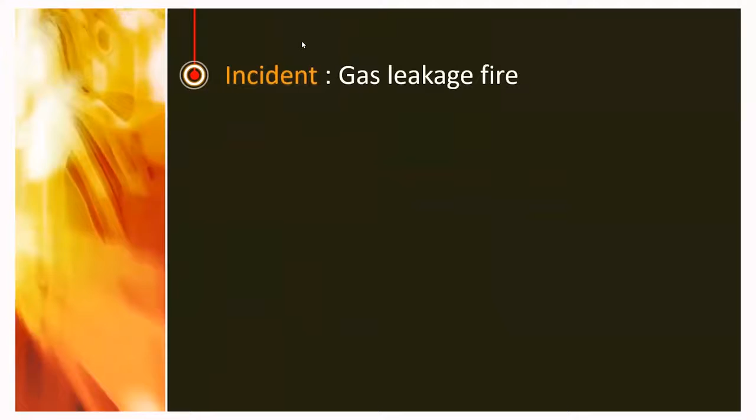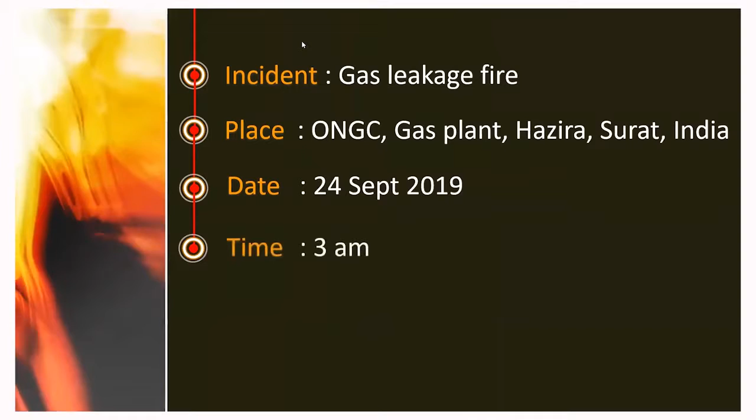It happened on 24th of September 2019 at Hazira. Basically, it was a gas leak and fire at the Hazira facility, Surat. Actually, I worked in a nearby industry for 1 year, so I am very much familiar with the place. It was on 24th of September at 3 a.m. at night. So there were many such news reports around about the incident.

So let us talk about PEAR loss. Basically, whenever we are talking about loss, we always use this term: PEAR - People, Environment, Asset, and Reputation. In the incident, it was not arranged like this, but we tried to map it accordingly.

People loss - what they mentioned, there is no injury or any fatality.

That is good. Environment loss - they mentioned a few damage to trees, but really it was a huge release and huge dense smoke. That part was not mentioned. So here only damage to a few trees is mentioned.

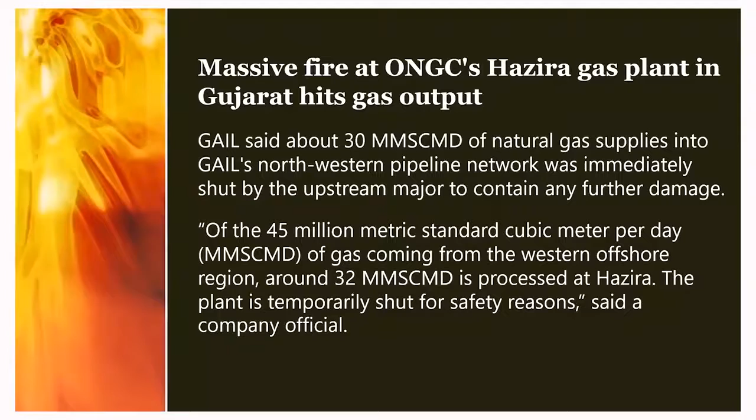Reputation - it becomes a news headline for all such news channels and newspapers here and there. One of the news headlines talked about 30 million metric standard cubic meter gas supply to the northwestern region being interrupted because they had to shut down the plant and all.

So this is all about loss. And now let us speak something about plant and process. It is basically not of much interest because we are talking about the incident, but really we need to get some information. So let us talk about plant and process.

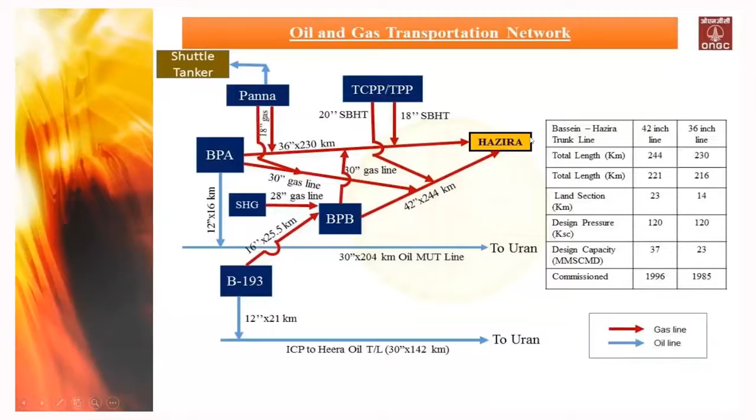Basically they were receiving gas along with condensate, and there is a huge network of such gas. One of the most important aspects - there are two lines, a 36-inch line which is around 230 kilometers long, and a 42-inch line which is around 244 kilometers, coming to the Hazira plant, meaning coming to the plant for processing, where the gas is processed in the gas terminal.

The gas terminal is nothing but a kind of separation of gas from condensate. That line, the 36-inch and 42-inch lines, were well designed for mixed flow of gas and liquid. In the gas terminal, it is separated through a slug catcher, and then gas is routed through various cleaning units for further distribution. Similarly, condensate is processed and routed for local customers and other finished products.

We will not talk much about this GSU, GDU and all because it is not of much of our interest, but yes, something happened to this gas terminal.

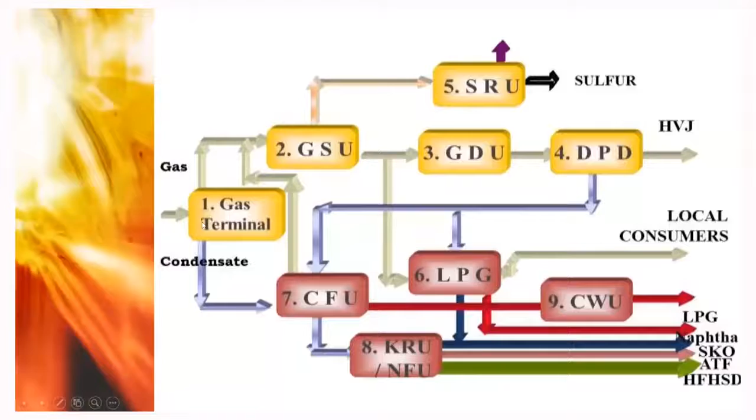So let us go through this block diagram. I tried to prepare this block diagram based on the description available in the investigation report. So here you can easily understand what is inside and outside.

For the 36-inch line, there are two lines, the 36-inch and 42-inch lines, coming to this gas terminal for separation. This is one of the isolation points - there are two isolation valves for each line, and another isolation is available, called the valve station. For the 36-inch line, the valve station was 1.7 kilometers away from the facility, so it is offsite, and inside there is one valve.

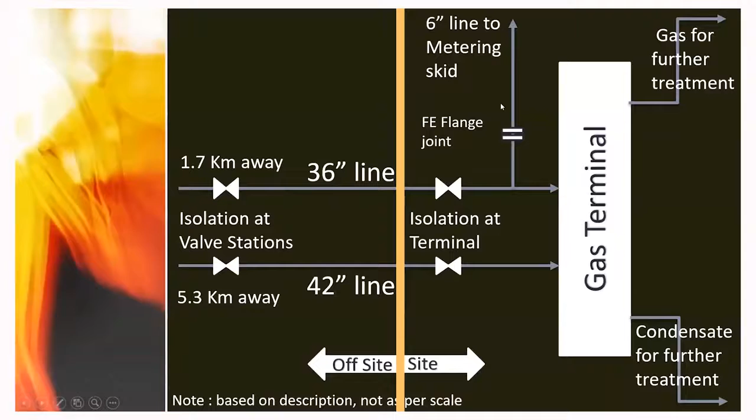Why are we talking about this valve? Because it is one of the points of interest in the discussion. After this valve, there was a connection for a metering skid, a 6-inch line, and particularly this flange was leaking.

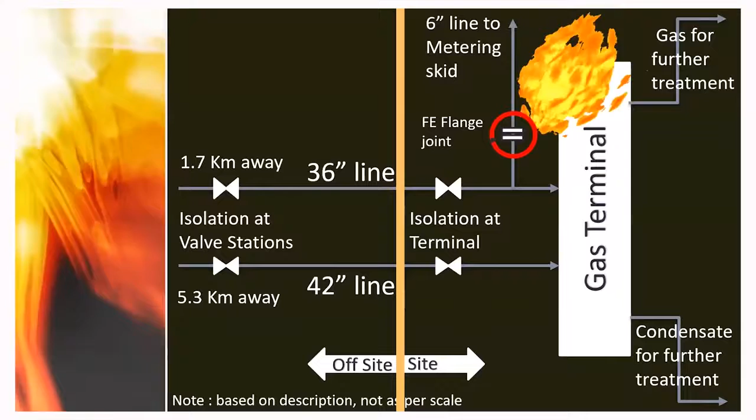I mean, it started leaking and then caught fire. So this is the location where the actual leak and fire happened. Again, it is based on my interpretation from the description, but more or less it is matching. So this is all about plant and processes.

Let us go through the incident timeline. What happened, at which time? At 2:15, one of the security guards observed noise as well as a vapor cloud from the location, and he informed the main gate control room, LPG control, and various other control rooms - they have a defined way of communication, so they communicated accordingly.

Almost after 3 minutes, the same thing was reported by one more person, and it could also be identified through CCTV. After around 2 more minutes, they started more communication, so everyone around was now informed.

Around 3:04, one of the pressure control valves - this pressure control valve, again, I could not locate because it is not a 36-inch line valve. There is something which is controlling the pressure downstream. So that valve was closed, but this valve is not an isolation valve for the particular gas line, which we will be talking about later.

At almost 3:08 hours, fire took place as per the CCTV footage timeline.

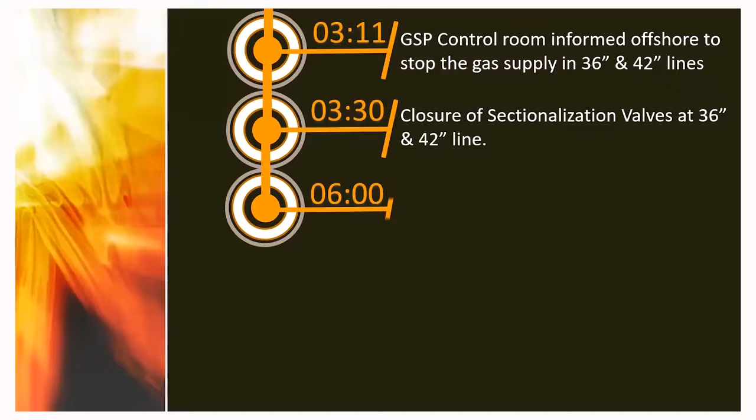At 6 o'clock, fire was controlled, and at 7 o'clock, this particular MOV3, that is the isolation valve, main isolation valve inside the plant, was closed, because only after the fire could they assess the location and close the valve. So this was a manual valve.

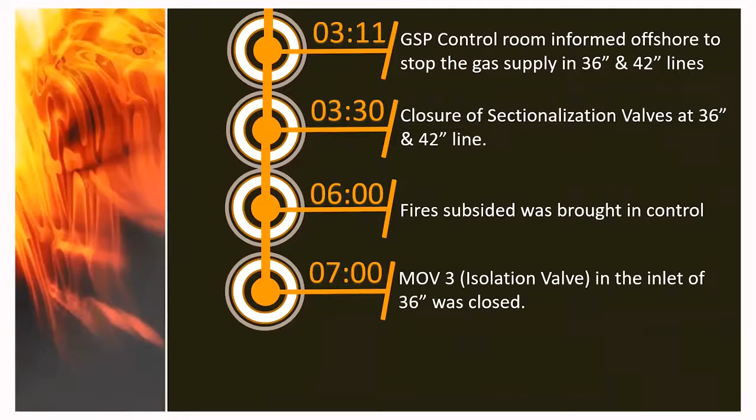Rather, it was motorized operated, but remote access was not there. From the control room it was not operable. It is only operable on site. And at 7:30 they declared all clear.

So this is the most interesting thing, which we can learn from at this point: observation and findings by the committee. The committee categorized the observations with respect to various titles like facilities, safety, maintenance, firefighting system, electrical maintenance, quality assurance, and all. Let us go one by one quickly, since we have limited time, so we may not go into detail, but I have kept some important points we can go through.

So for facility, based on that observation, they observed various things like a mismatch of drawing in P&ID versus what's available in the field. Some of the PT and delta T transmitters were available in P&ID, but they could not locate them in DCS. So actually it was not there, or where did they disappear, it is again an issue.

Mismatch of time stamping - they wanted to check various DCS data for the same event, but there was a mismatch of the same event from one panel to the other panel. So again, it is a mismatch.

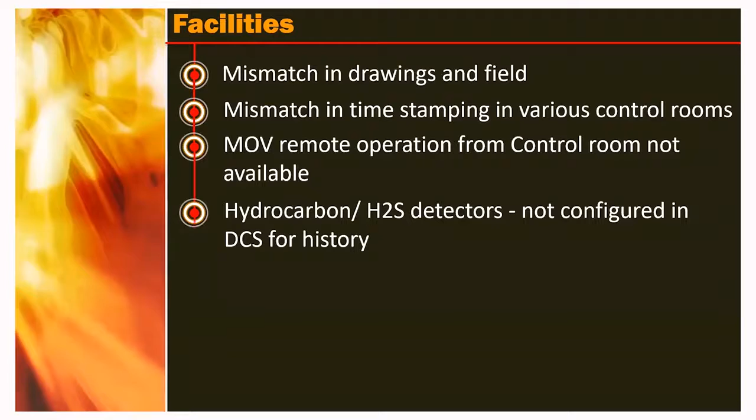No provision for auto shutdown of the plant. This is the highest kind of design deficiency, we can say - not even an automatic shutdown or any automatic fire suppression system. Let us quickly go through the next point, with respect to safety.

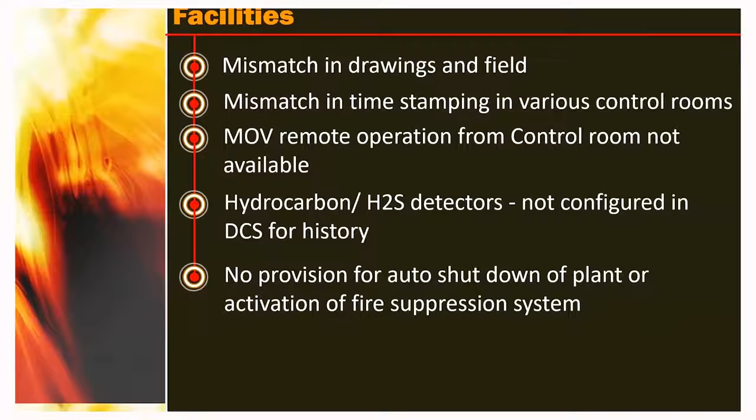From safety, they have targeted a few audits like self-safety audits, internal audit, external audits, fire drills, incident reporting system, and even emergency response system.

For self-safety audit, what they observed is the audit was done, but they were using a checklist where many of the checklist items and observations were not covered. So there is no meaning of preparing a checklist here. And with respect to that, there was no specific checklist for the plant - it was some very generic safety check.

With respect to internal audit, they could identify there were 2 audits in 2018 and 2019, but there was no checklist. So again, how they will be doing the audit is a question for them.

External safety audit - the observation is there were 308 recommendations done in 2018. So from the external audit itself we can understand what are the gaps, a huge gap. Out of these 308, 296 observations and recommendations were completed. But sometimes how we are completing - just marked done without any further action sometimes. And even the balance, almost 12 observations, were still open, and they extended the date up to April 2021. So these are some of the observations.

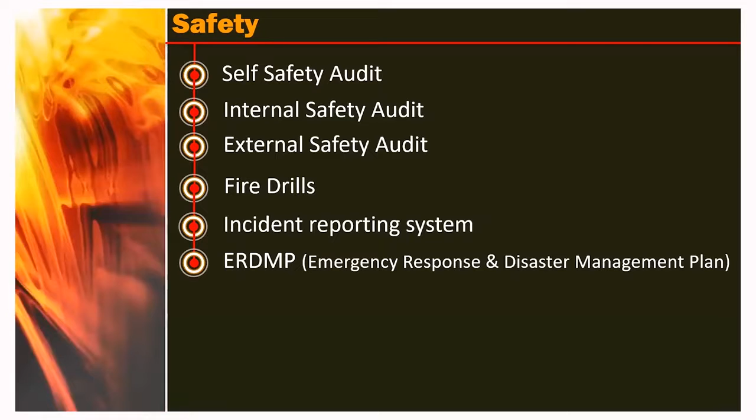They were doing isolation - the leak started at 2:15 and they were doing isolation at 3:30. So a huge gap. The very first step, as we all know, shall be to isolate the system, but they could not do it since their emergency response plan does not talk about it.

Can you please mute somebody?

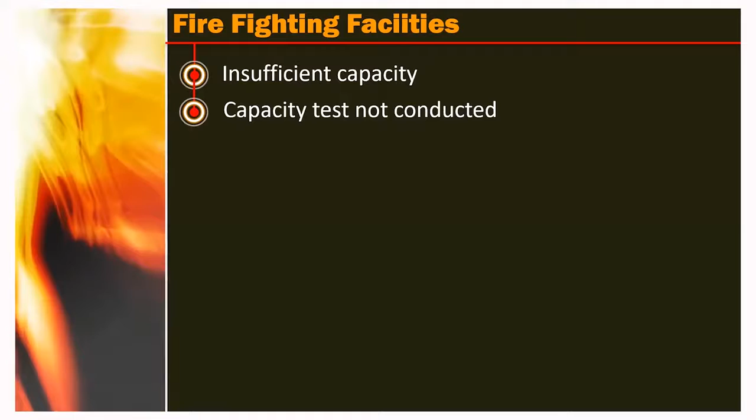Capacity test not conducted as per OISD - basically as per legal requirement, the Oil Industry Safety Directorate. There is a legal kind of requirement, but they do not do capacity tests, or even fuel consumption is not logged.

Clear roles and responsibility not defined. How can we understand - the maintenance and operation of pump, tanks, pipeline, hydrant are monitored and carried out by various departments, like utilities, sometimes maintenance parties, sometimes other agencies or contractors. And how they are performing their roles and responsibilities is not monitored, functioning also not monitored.

The actual firefighting operation was by CISF, which is an outside agency, and ownership of the assets was with ONGC. Even with CISF, basically security staff.

How they are doing firefighting and all - again it is a question. They were reporting to fire, meaning they were carrying out such activity under the guidance of the fire chief, but they were reporting to the shift in-charge instead of the fire chief. So there is mismanagement - there is no particular fire crew or something.

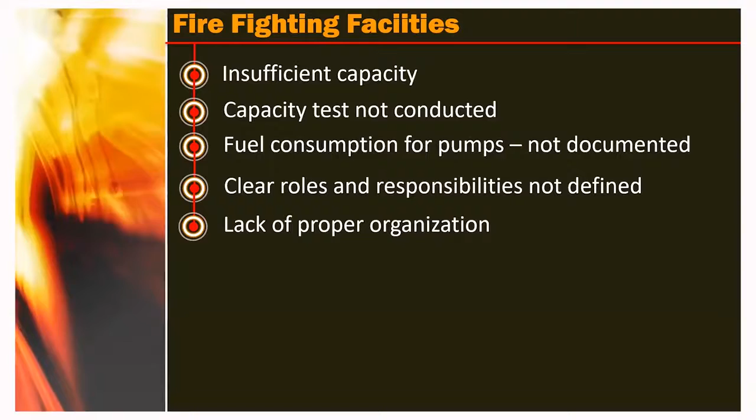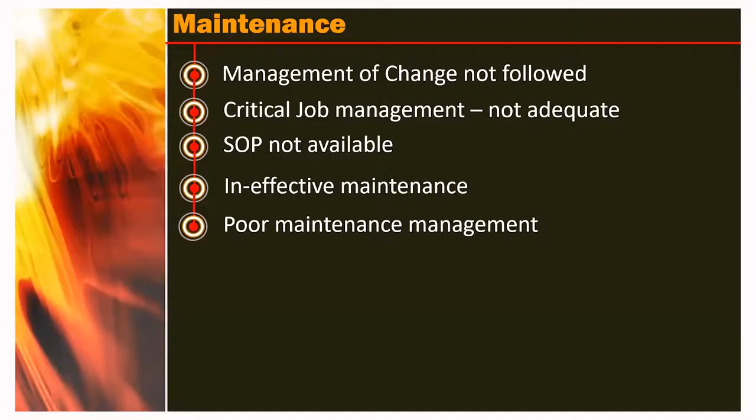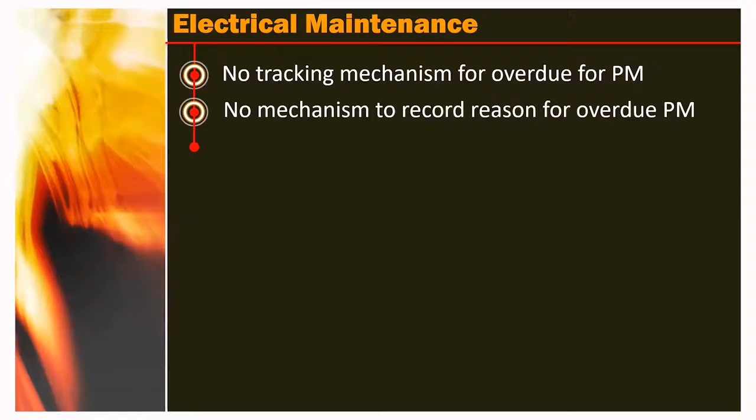Another point with respect to electrical: no tracking mechanism of overdue, similar to maintenance - no mechanism to check overdue, no mechanism to record reason for overdue, and no unique identification.

This is one of the interesting items because it is relevant to our incident. They have a number of flame-proof electrical equipment like lighting junctions and all, and they do not give a unique number to that. So it is a gap - there is a chance of every time missing some item or every time repeating some item. So for preventive maintenance, it is a gap if we do not have a unique identification number.

Inadequate electrical audit. After this incident, there was an audit, but again we can say they do not learn. After the incident, they had an electrical audit to check the electrical connections and other equipment, and they generated a report which was just a generic one-page report - they did not mention detail about anything.

In particular, one of the lamps was found damaged, and that was the cause of the ignition source, but they did not mention anything about this particular lamp.

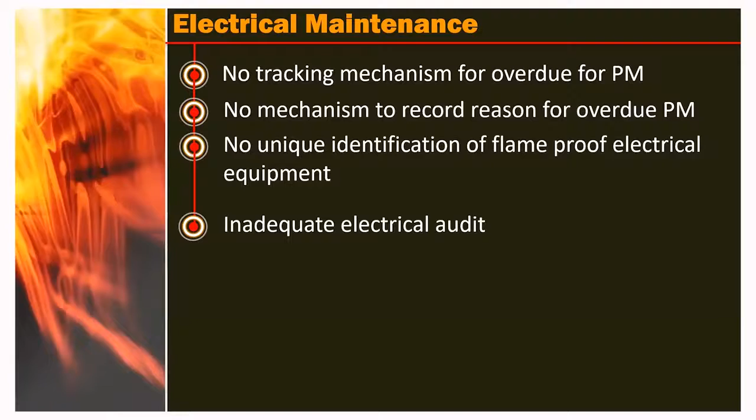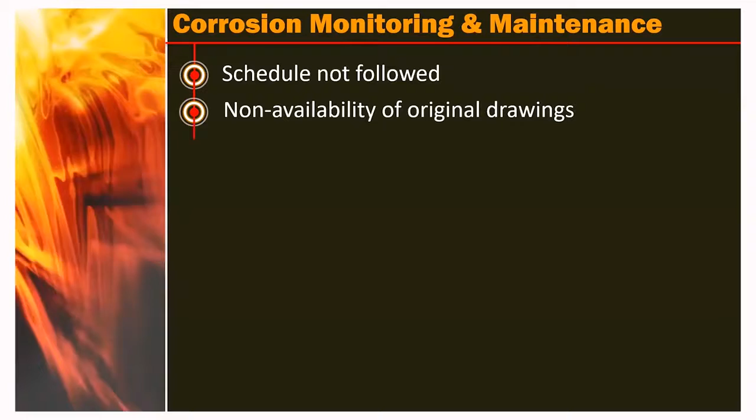With respect to corrosion monitoring and maintenance, the schedule was not followed, and there was non-availability of original drawings. There were many such issues - no procedure for selection of thickness survey points. So there is a case that a particular line may not be checked because there is no procedure on how to select the spot, and there are chances that one spot is being checked every time while some spots are not checked at all.

No action or insufficient action on monitoring. Basically, in 2000 they had a schedule to do monitoring every 4 years, but they did not follow it. They did one survey in 2011 and the next survey was in 2017 - so there is a gap. And in one of the surveys they identified various thickness losses, but they did not do anything about it.

Even at one of the thickness survey reduction points, what they did was apply coating - not even coating, just paint. Whether painting of a pipe is sufficient as a corrective action for thickness reduction is again a question.

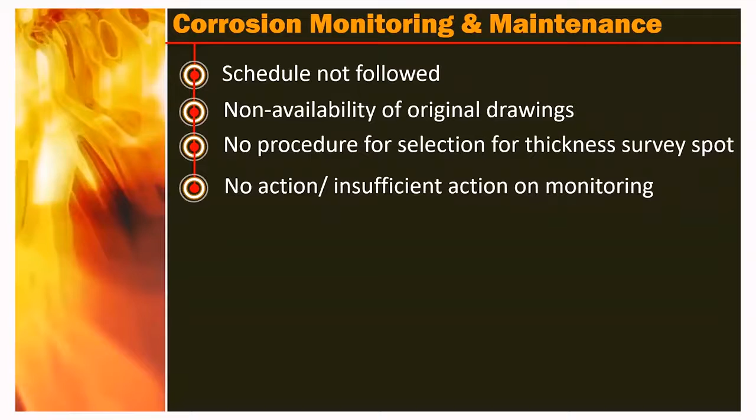Some general observations they could identify: lack of proper design of the control room. The newly designed control room was supposed to be blast resistant, but the doors were not blast proof. So that shows improper design.

Inadequate training and competency - we can easily identify that CISF security personnel are performing the job of firefighters. They clearly mentioned that training with respect to safety, operation, control room handling, logbook writing, and what to do in case of emergency was not at all managed. People were not trained. What they have is a 4-day training program for new recruits, and after that, no training.

So whether that is sufficient, we can easily understand. Even the qualification of staff is not mentioned in HR as well as operation policy. What they observed is that most of the staff attended their last training in 2018, and after that, no training - so 3 years without training.

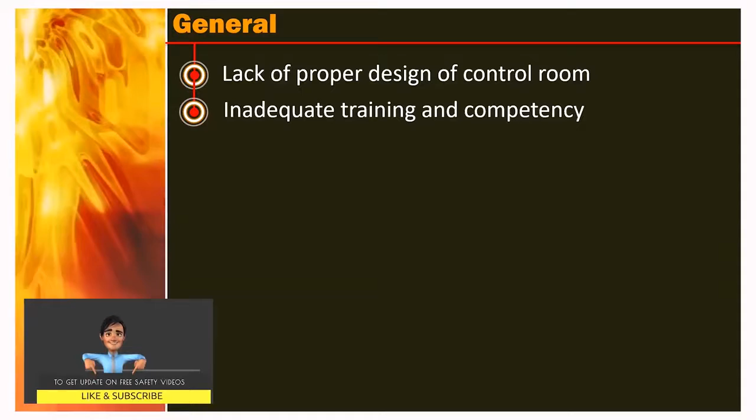MOC procedure was developed in August 2016. They developed the procedure, but it was not rolled out. So without rolling it out, how will the people come to know there is a procedure and that they need to follow it?

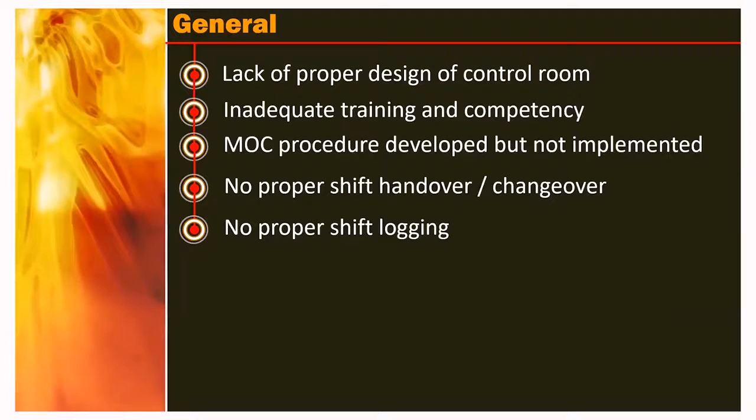No proper shift handover or changeover. People are writing logs in just a makeshift arrangement register. They were not even entering activities, events, or alarms, and the handover/takeover procedure is also not in place. So these were all the observations.

Due to lack of time, we are just running through the observations. Now let us move to the immediate cause and then the root cause.

Immediate cause was the leak they observed. The leak was from this particular flange, because just a few days before there was maintenance on that, and without any hydro test, it was put into service. Majority of the bolts were found broken - damaged - but whether the specific leakage from the pipeline was due to corrosion or the flange leak, they could not ascertain.

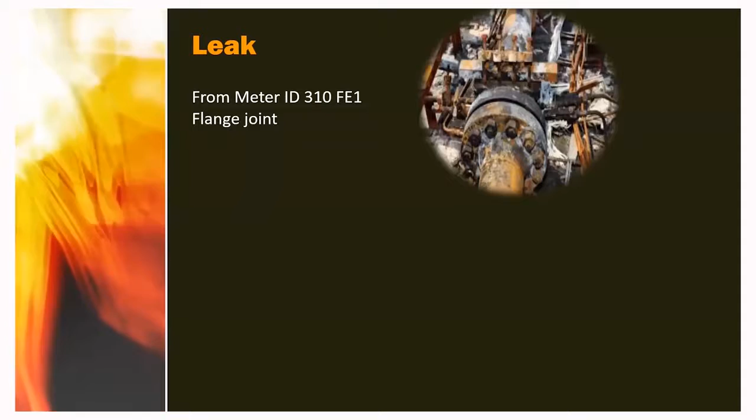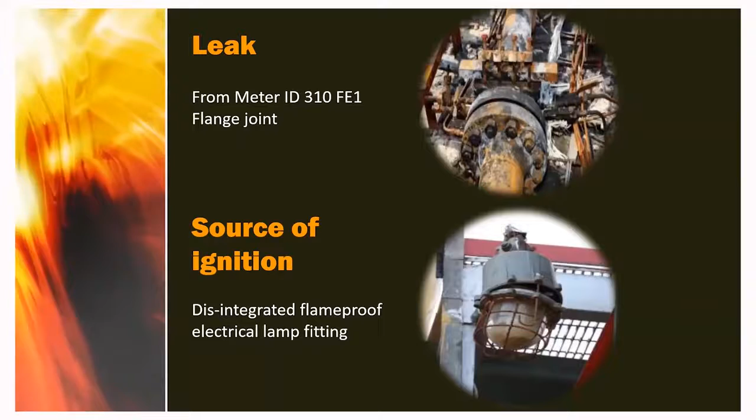Another aspect is the source of ignition being one of the disintegrated flame-proof electrical lamps. What they observed may not be part of the preventive maintenance program, because of lack of a unit identification number.

Regarding root causes, what they mentioned as root cause is again a point of discussion, and Mr. Ujjwal Ritik will focus more on the report.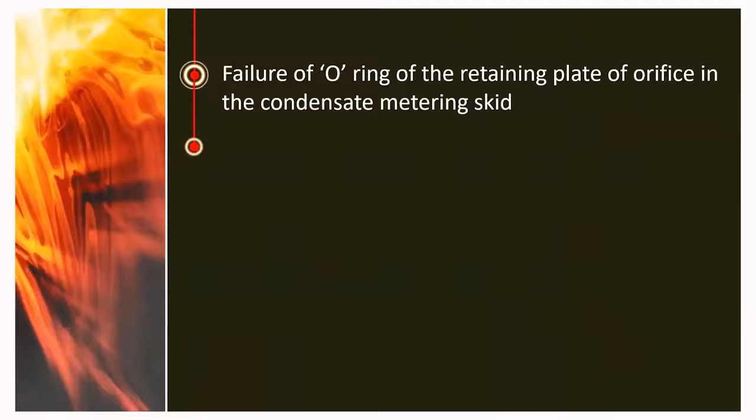Failure of O-ring and failure of the retaining plate of the orifice in the metering skid, use of non-standard O-ring, and lack of control over material sourcing, because they are just doing local purchasing with no control over that.

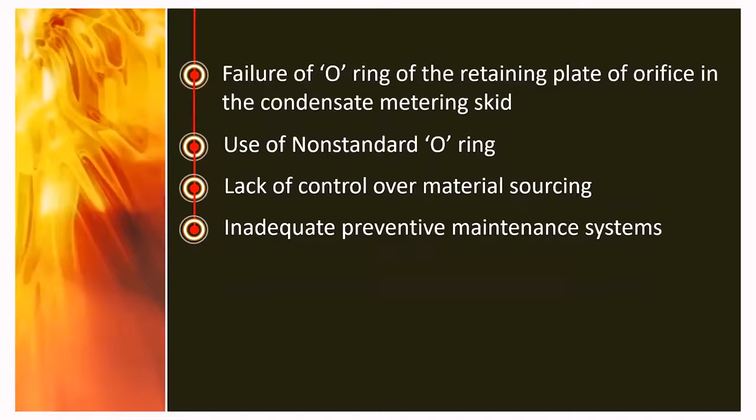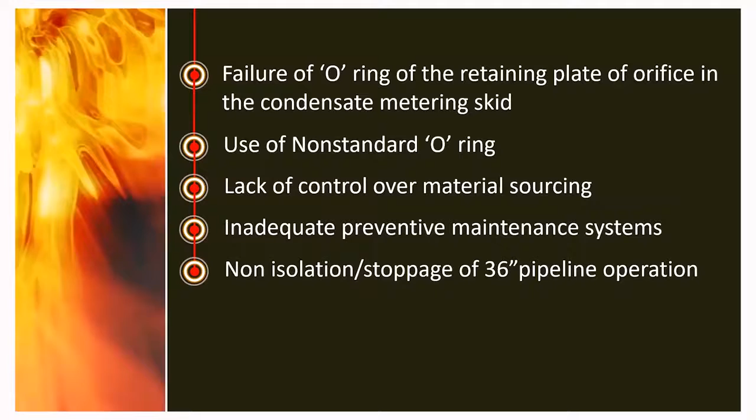Inadequate preventive maintenance system, which we already discussed in detail. Non-isolation and stoppage is one of the issues. They closed the valve even at the valve station at 3:30, and even after extinguishing the fire, they could not stop the leak at the local isolation point.

Regarding committee recommendations, we will not talk much in detail, because whatever observations they identified, they gave line-to-line recommendations. For example, they mentioned that all P&IDs should be checked.

First of all, we much appreciate the efforts made by ONGC, and particularly the Petroleum and Natural Gas Regulatory Board, that they instituted such a process of independent inquiry—I mean, relatively independent inquiry, I should say—and the report has been put in the public domain.

But one thing that strikes me is that the intention of the report is not very clear. They talk about one intention being that this incident does not happen again, but they don't specify where it should not happen—in that same plant, similar plants, ONGC, or oil and gas facilities across India, since they have hundreds of such facilities under the Petroleum Regulatory Board. If that intention is not immediately clear, then it's not pointed out who this report is meant for, and therefore who will learn from it is also questionable.

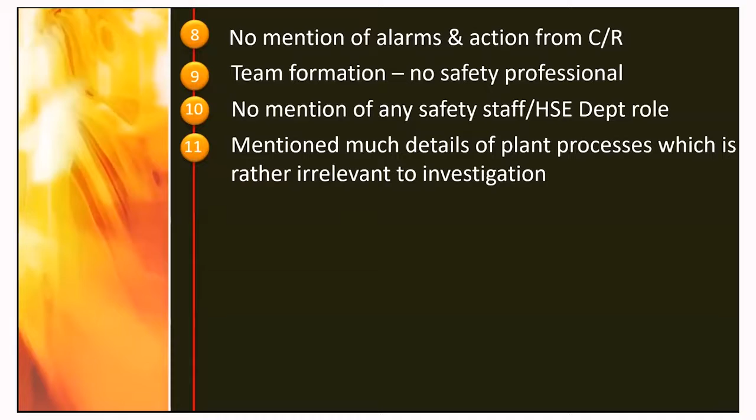And funnily enough, to the extent I could study the report, they had not mentioned much about the location, the skid, the 8-inch line, the 6-inch line, the location of the flow element, orifice, all such things.

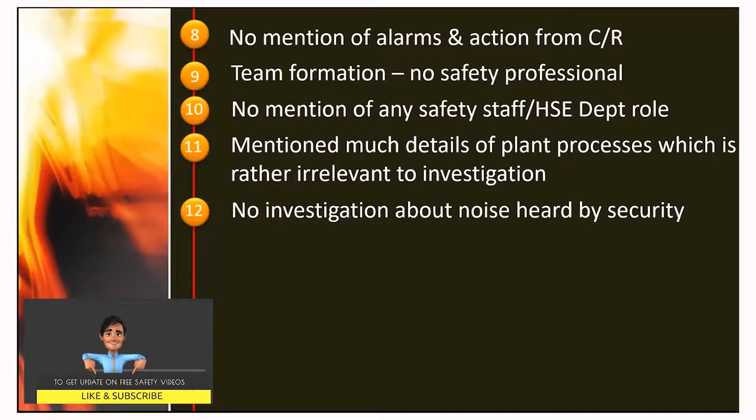They are abundantly lucky that there was no explosion. But again, that's questionable. We have shown you initially a newspaper clip, I think from Hindustan Times or some other news agency. 3 explosions were heard by the public. They are not talking about within the plant, they are talking about the public, and the public heard 3 loud explosion noises.

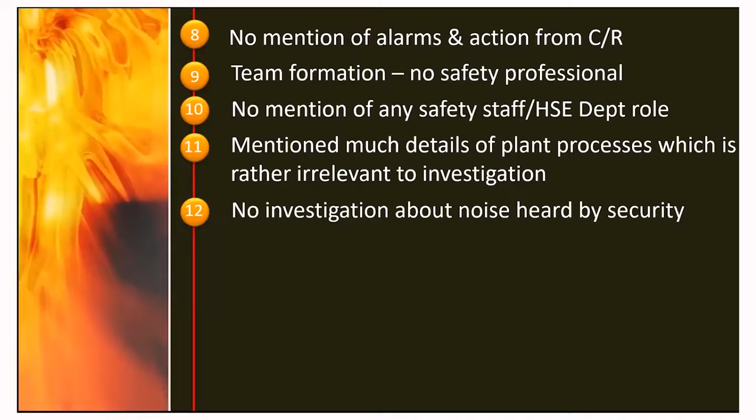The whole report is completely silent about that. In fact, as I told, nothing is mentioned about the noises heard. And as we know, in any investigation, noise counts.

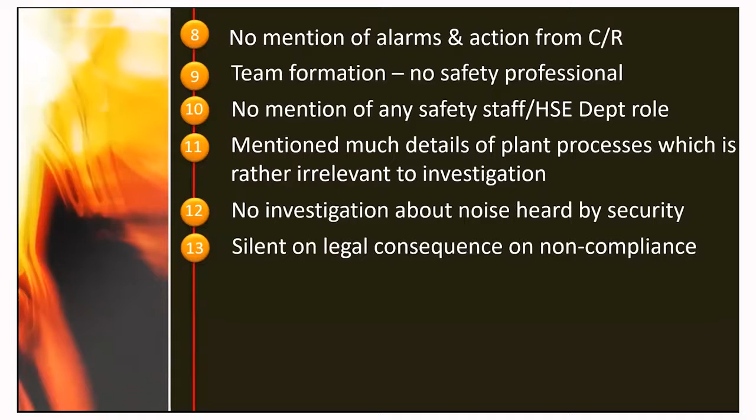Silent on legal consequences or non-compliances, etc. In fact, what OISD norms, what petroleum regulation norms were violated, nothing — the whole thing is completely silent about the legality, the techno-legal aspect of the situation.

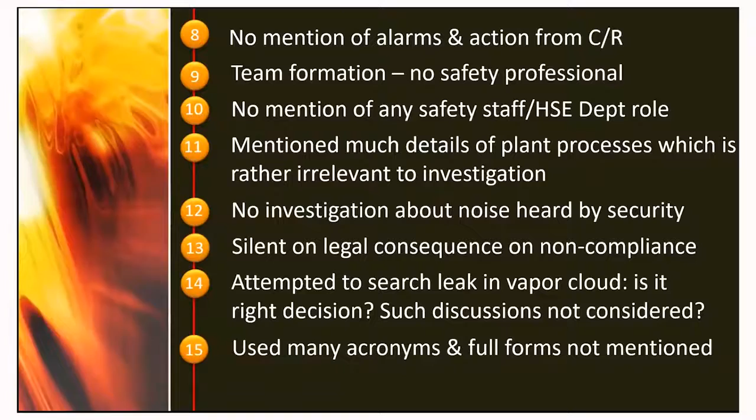Used many acronyms, and full forms are not mentioned anywhere in the report. So unless you are fully familiar with the plant, the system, the organization, and the various terms and abbreviations they are using, it becomes very difficult for an outside reader to follow the report and make full sense of it.

Now, my small submission is that yes, I fully appreciate the work done by the committee. They have done their work to the extent that was possible, but as I told, their efforts, whatever efforts they have put in, have been devalued by the process that they followed.

The whole process, I mean, getting into the incident, investigating the incident, and making it public — it being in the public domain through PNGRB — is very much appreciated. But again, as I told, there is much to be done.

In fact, this regulatory board has a lot of work to do. I cannot get into further detail, although there is much to be said. Questions are raised.

Only 7 incidents since 2016 reported. Now, anyone who has any idea about the hydrocarbon industry in India will look at it with much doubt. Only 7 incidents since July 2016 until March 2021 or January 2021 — it's kind of difficult to accept.

How the lessons were learned by ONGC — the whole report does not talk about what lessons ONGC as a company must learn. And as I told, how the lessons were learned by this Petroleum and Natural Gas Regulatory Board or the industry as a whole, they have learned — very difficult to gauge.

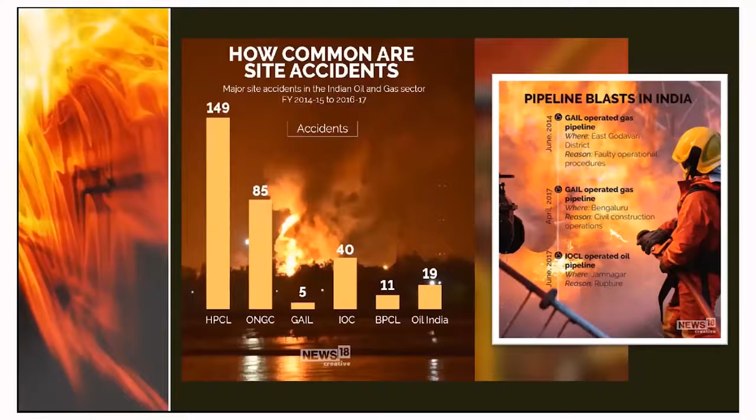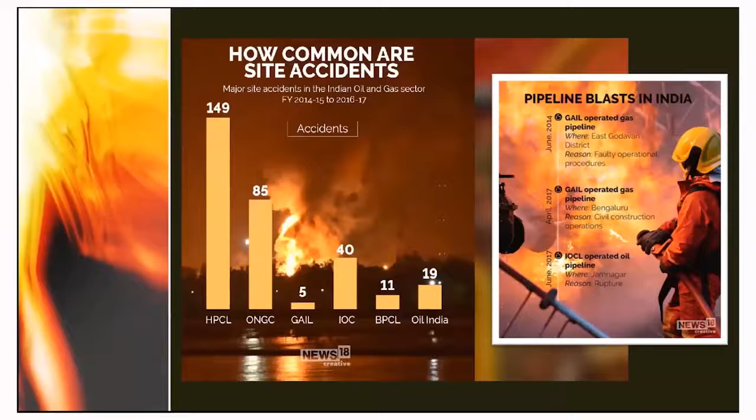Incidents are common, pipeline incidents are common. I have just collected some media reports. They may or may not be correct, but at least it gives a flavor that we are much beyond what is actually shown on their website, on the PNGRB website.

So in conclusion, some of the lessons were not learned. Many of the lessons were not learned. In spite of this effort, accidents keep occurring, lessons are not learned, and there is a need for improvement in the investigation process and competency of investigators.

Again, I don't want to say for a moment that these 3 people who conducted the investigation were by any means less competent or insufficient, but the report goes against them, not so much in their favor. So, lost opportunities for learning. There was an incident from which we could have — within the industry, within that country, outside the country — students like us would have learned, but we could not.